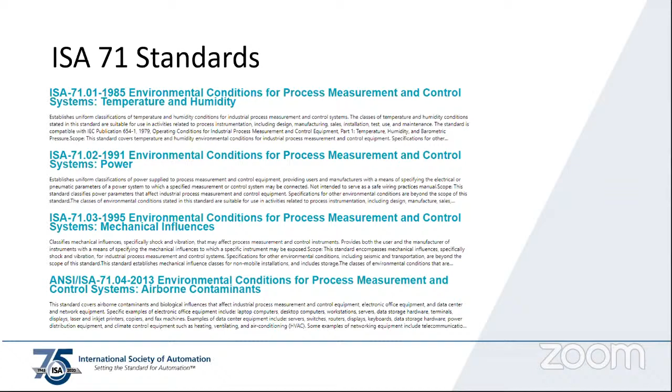So please consider that. So the ISA 71 standard that we're going to talk about today, or the 71.04, is actually one of 4 different standards. So 71.01 was related to temperature and humidity. 71.02 was related to power quality, and then 03 was mechanical influences that you may have to consider, and then the 71.04 is the airborne contaminants. So we'll talk a little more about that.

So to give the history behind 71.04, currently we're at the 2013 revision, but it initially came out in 1985, and it was really set up to look at the airborne contaminants that were affecting industries. And someone can correct me if I'm wrong, but it appears to me like the main industry that was calling for this in 1985 was the pulp and paper industry.

So any of you all that have been in a pulp and paper facility know that there are some highly corrosive gases present, and electronics can take a beating, and even electrical equipment, things like a motor control center, the copper can degrade based off of the corrosive gases that are in the environment there. So in 1985, the standard was born, and it was a way to classify the types of gases that were present and the amount of corrosion that you could expect on your copper as a result of those corrosive gases.

This standard was revised in 2013 as a result of RoHS. And RoHS, if you may know, is the, well, I used to always call it reduction of hazardous substances, but actually that is incorrect. It is the restriction of the use of certain hazardous substances. So that was a European directive that came out in 2002 and was implemented in July of 2006.

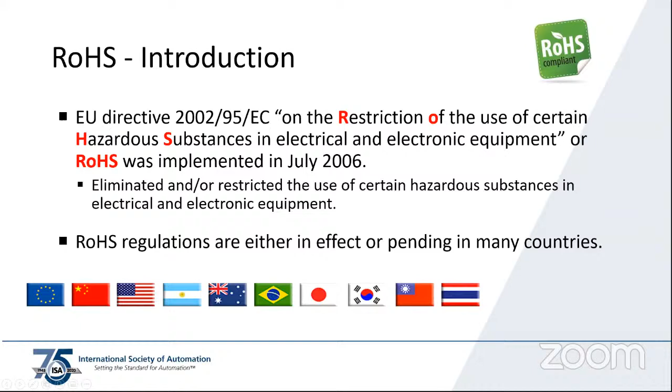So this was the goal. The goal was to reduce lead, eliminate lead from the manufacturing process. And lead was used as a way to bind electronic components to other components through solder. And typically copper wasn't left totally exposed. It was usually covered with a coating or with lead so that it wouldn't deteriorate.

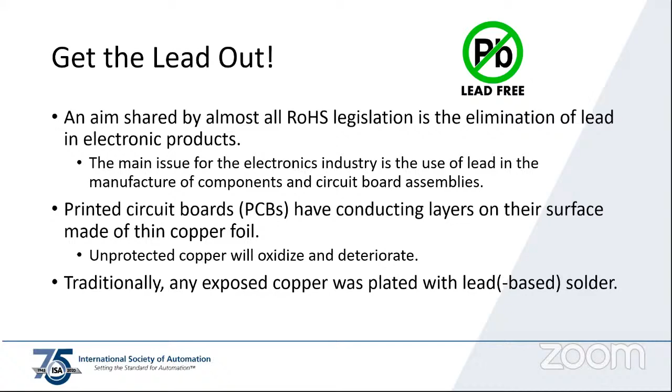But RoHS had some unintended consequences. The manufacturing process switched to where most printed circuit boards were now manufactured with a silver dip process. And silver is a little more reactive than copper, and definitely more reactive than lead, which is hardly reactive at all to chemical elements. So as a result, now with electronics, you can see with the silver dip process problems where you have these flowers, they call them, where you have dendrite fingers grow from the silver and can create shorts in some cases or opens in other cases where you're having continuity issues.

So with us in the electronics world, we don't like varying resistance, and we really don't like a resistance value going to 0 or infinity. So that was the issue we have here with some of the formations as a result of the use of silver instead of lead solder.

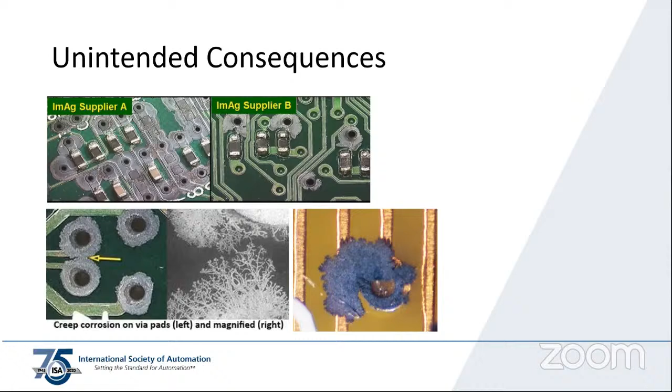So here's the information on RoHS and reliability. The silver immersion technique gives a path for dendrite fingers to form on surfaces. They can get underneath surfaces and then combine surfaces. So you can make opens or shorts as a result of it. And so this is a pretty serious concern.

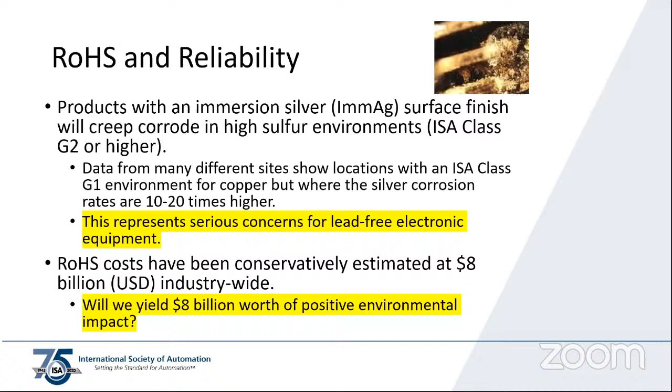It's a big question. So going back to the ISA 71.04 1985 edition, back then, the only thing you were really worried about was copper reactivity. So you classified your area as G1, G2, G3, or GX. G1 being mild, meaning that your electrical equipment and your electronics could live there without any problem for quite some time. If you had a G2 level, a moderate level of reactivity of copper based off of the gases present, you could potentially see some corrosion. So you might want to take that into consideration and implement some form of remediation or prevention of the gases attacking the equipment.

Now, if you got into the G3 area, your probability is getting much higher that a corrosive attack will occur, and then you get above into the GX level where it's severe, and now you're looking at equipment that's specially designed to be able to survive in that type of environment. So it's a very corrosive environment.

So the reactivity is measured in angstroms. If you're less than 300 angstroms, you're G1. Less than 1,000 angstroms, you're G2. Less than 2,000, G3, and then anything above 2,000 angstroms is a GX or severe level.

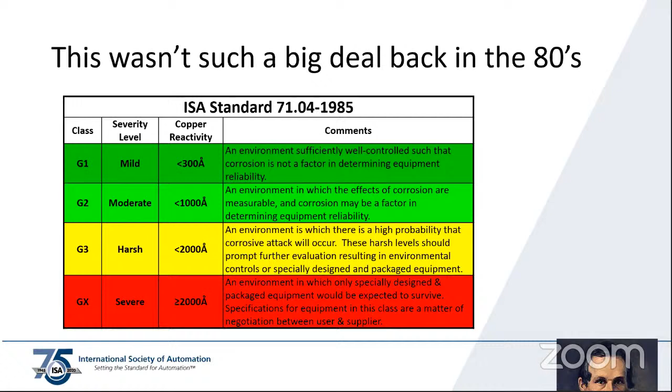So what's an angstrom, you may ask? This guy, he's an angstrom. That is Anders Jonas Ångström from the 1800s, and he came up with this unit of measure. An angstrom is actually 10 to the negative 10 meters, so 0.1 nanometers is an angstrom. And to give you a reference, for most elements, the diameter of the atom is about 1 angstrom. So very tiny.

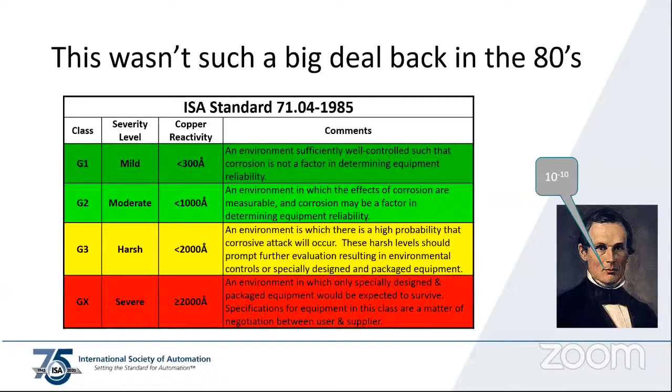And I'll turn my little handy dandy laser pointer on here, which Wayne showed me earlier.

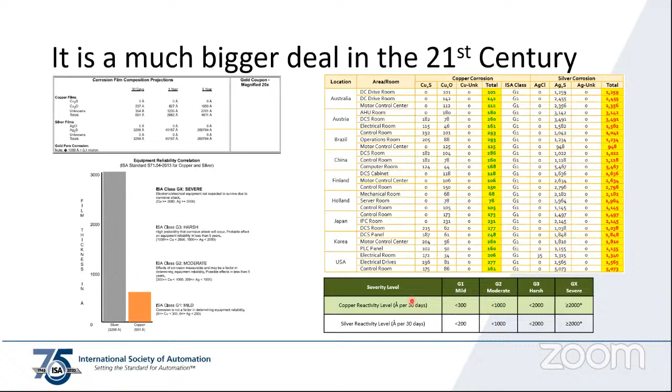But now you come over here to the silver column and you look at silver. Right here we're at 1200 in this DC drive room in Australia. So that's a G3 right there. So it's a low end of a G3. Here we're low end of a GX right now. GX, higher GX, G2, G1. So you see down the road here, we've got more of an issue now because of the silver reactivity. So as you may know, this is kind of a big deal.

All right, but there's more. It's more than just the silver reactivity. Guess what affects chemical reactivity? Humidity and temperature. Does that sound familiar to anybody on the call here? High temperature, high humidity environments. There have been studies that say that the chemical reactions can actually occur twice as fast for a 50-degree increase in temperature. And then that gets even compounded more when you add humidity into the equation as well.

So you need to be concerned about temperature and humidity, not just while the equipment is operating, but is it being reacted while it's sitting in your warehouse on your shelf in storage or in transit to your facility? The reaction process could be occurring anywhere along the line, from the time the product is made, transported, stored, and installed in your cabinet. So commissioning, doors are left open during the commissioning process, and there's a corrosive environment there. Is the electronics being affected at that point?

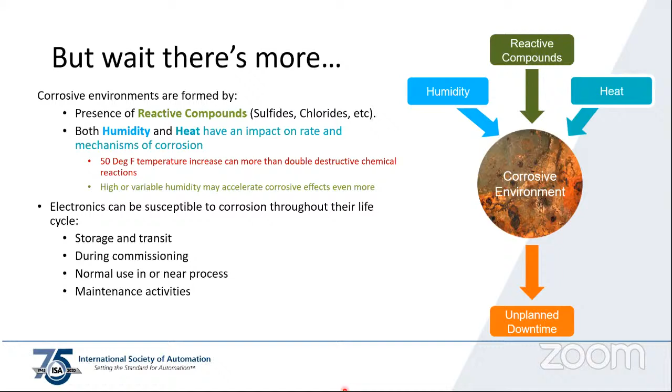Normal use and then maintenance activities. Sometimes, as we all know, some periodic maintenance may actually introduce problems, because now you're opening cabinets and doing work and again providing a path for those chemical reactions to occur in those electronics. Okay, and there's even more. Besides temperature and humidity being contributing factors to silver reactivity, what are we doing in electronics these days? Running smaller and smaller components at faster and faster speeds that generate more and more heat. So that compounds the problem even more.

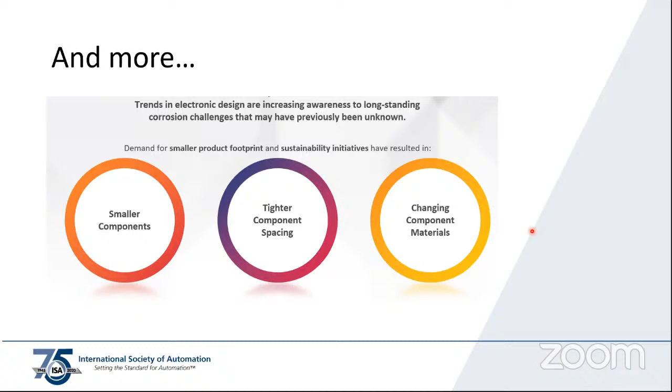So all this leads to some unplanned downtime, and there are several issues here. One is that industry standards such as 71.04 are not widely known. The standard's been out since 1985, got revved in 2013, but it's still not a widely known standard. In 28 years of doing this, I think I've seen 2 specs come across my desk that had someone asking for their electronic equipment with a G3 rating or better. I know we have products like that. We do conformal coated products, and I'm familiar with people using those in harsh environments. But as a general specification, I don't really see that too much.

Sometimes problems are misdiagnosed. So maybe you've got a problem with an electronic component and you're thinking, oh, they just don't make them like they used to. The quality's gone down on this product. Maybe that's not the case. Maybe it is the manufacturing process, but it's due to the way the world now tells electronics manufacturers how they have to manufacture those components, because they can't use lead anymore.

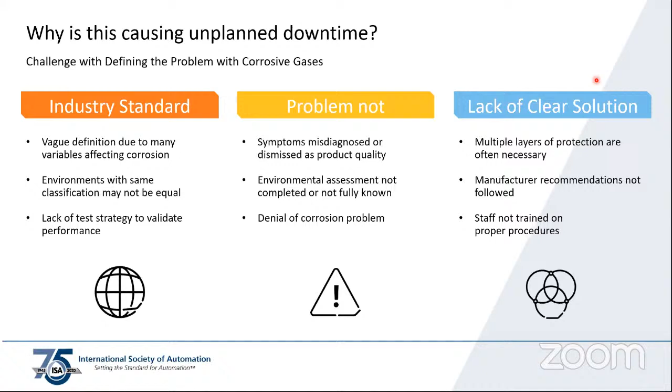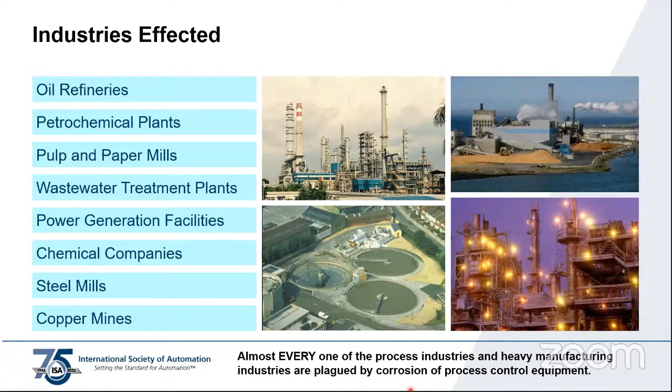So first off, who are the industries that are affected? Well, most people on the call here, you're probably in one of these industries. So refineries, petrochemical plants, pulp and paper, which we talked about, kind of the genesis of the problems came out of pulp and paper, water, wastewater, power gen, steel mills, copper mines. They all are affected. One that's not shown on here is the tire and rubber industry. And actually, it's my next slide. I'll go through that. Tire and rubber is a very caustic environment.

And so here's just a table from a design guide that I had access to for the tire and rubber industry. And it goes through the various process locations and then classifies what you're most likely to see corrosion risk-wise in these areas. So the mix area, those are GX. Component preps, where you got your extruders, those are GX. Now you move over into the tire building facility, you're still G2 or G3 here. Curing process, you're back at a GX. Even the conveyor lines are at G3 or GX for the cured products.

You don't get into kind of clean air, if you will, until you get into the conveyors for the final finish area, or in your material handling side. Once you've built the tire and you're storing it in the warehouse, now you're down into a G1 environment.

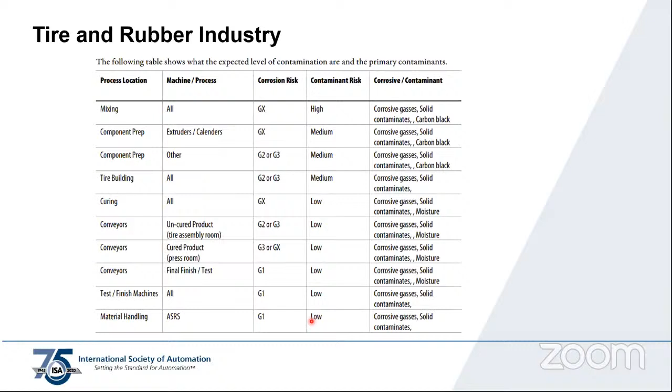Water, wastewater, kind of same thing based off a design guide here. Here are a few different locations in a water treatment facility, and their levels and what types of gases are present here. So office space, you're okay. Electrical room, probably all right. Now you get into the headworks and clarifiers. Those are high corrosion environments. Sludge dewatering, sludge storage, lift stations, all high corrosive environments.

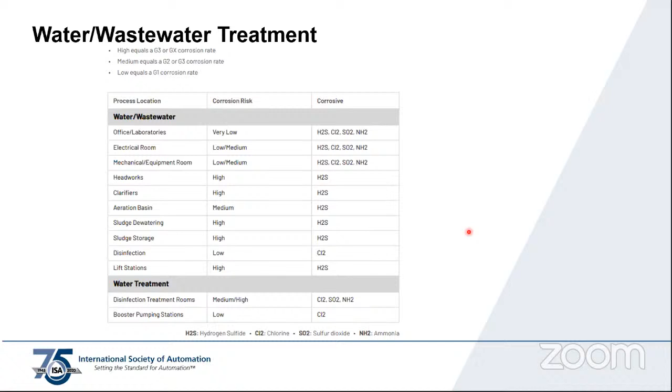So what's the cost of corrosion? Well, whatever an hour of downtime is for you is what you would figure out. It's going to take you multiple hours to figure out the problem, but we all know about the cost of downtime. In this particular case, pulp and paper mill, kraft paper. For them, it's $42,000 plus per hour of downtime.

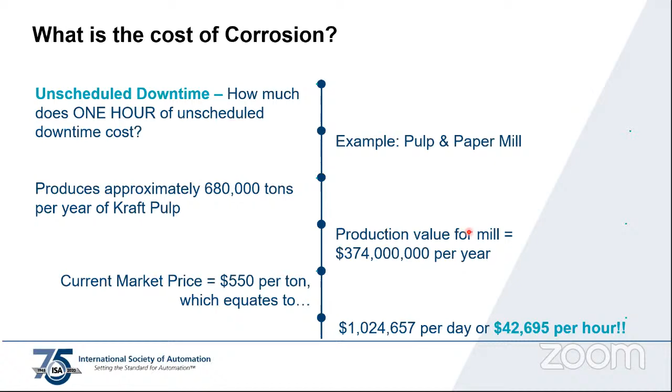All right, so we've kind of stated the problem. Now, what do you do to fix the problem? Well, there's a three-step process, and it really consists of first assessing your area. So figure out, do you have corrosive gases present in the enclosure or in a building or in an area? And if so, how bad are they? How bad do they react copper, and how bad do they react silver?

Next step is, once you know what you're dealing with, are you dealing with G3 level gases? Are you dealing with GX? Are you just dealing with G2? Based off of each issue, you come up with a control strategy to knock that level down to an acceptable level, which would be a G1 level. So as I mentioned, there's no one silver bullet. And so just like safety and security, it's all about layers of protection. You build several things into your process to protect and control the corrosive gases that the equipment's going to be exposed to.

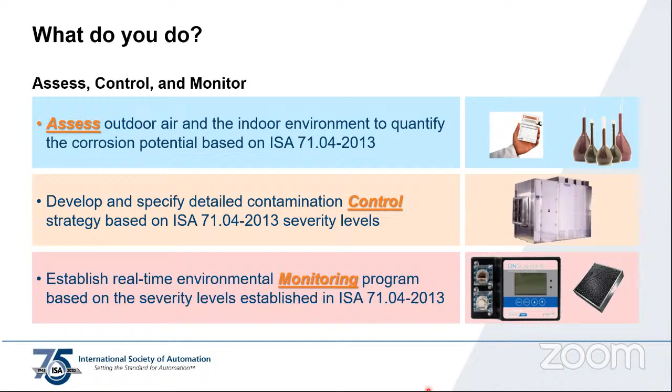And then once you put your control procedures in place, you need to monitor them. You need to make sure that what you put in place is still holding. You may have spent a ton of time sealing your enclosures up and making sure that all the penetrations were nicely sealed. But you got a PM happening and somebody leaves a door open on the enclosure, and so now you're back to square one. So you got to continually be vigilant and monitor the conditions. And the ISA 71.04 standard can help with all this.

So the first thing on the assessment side is what's called a corrosion classification coupon or a reactivity monitoring coupon. As I mentioned before, very simple, low-tech, at least on implementation and the testing side. All the smart guys in the lab have to give you the analysis. But what you do is you get one or several of these corrosion classification coupons, and you put them in various locations. So you put them near the return air in, let's say, a drive cabinet that's sucking return air in to cool the drive.

You may want to put one on that enclosure, various points in the building. So places where there's airflow, you may want to put one of these coupons. And what you do is you leave that coupon there for 30 days. And then at the end of 30 days, you put all your information on there: company, location, application it's in, the date you put it in, the date you took it out. So all the various information about the application.

After 30 days, you put it in a bag, send it back to the lab. The lab analyzes it, and then they generate back to you a report that shows you what's going on in your facility, and how reactive copper is and how reactive silver is based off of what's going on. And there are various manufacturers of these coupons. I can think of probably 3 or 4 people that offer these coupons and these services. There are variations to these coupons too.

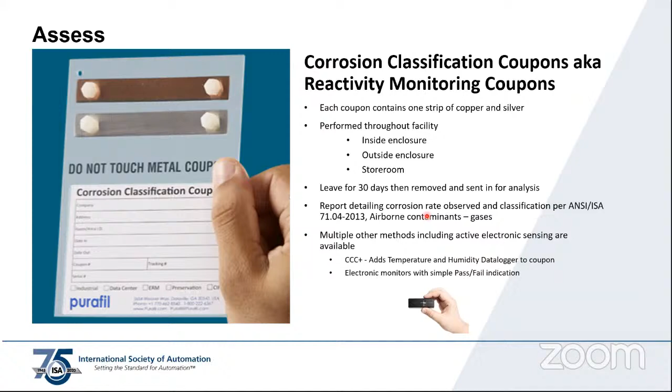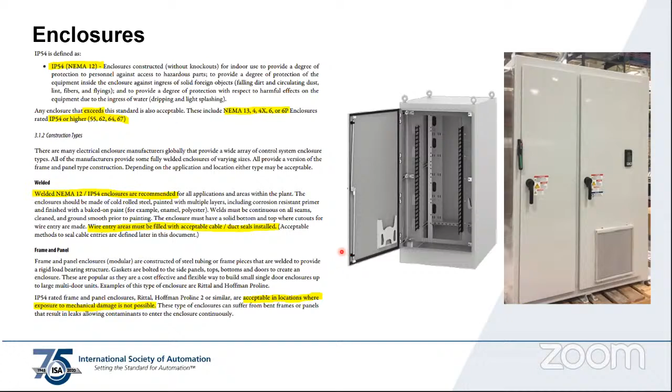One thing to note here is cleanliness, looking in and making sure that your cabinets stay clean. Because the gas isn't the only contaminant that's an issue, dust is an issue for electronics as well. So it's always good to keep a clean cabinet and keep the dust down.

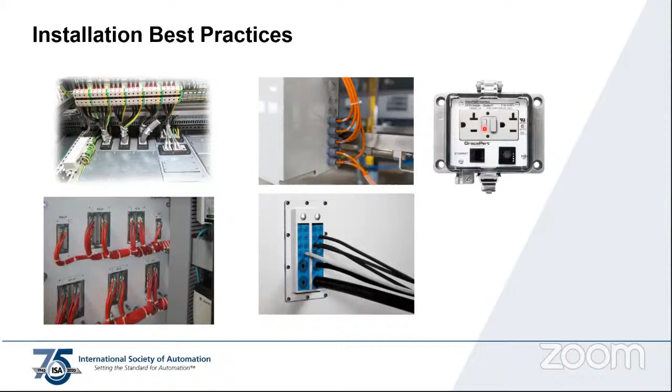And then you want to keep the doors closed. So if you're going to spend all the time sealing these devices and cabinets up, you can use a device to keep the doors closed. If you need to access a drive, a PLC, or your control system, there are devices you can mount on the enclosure that allow you to get access to that network without having to open the door. So those are good to have as well.

All right, so the next thing you want to do is make sure you're looking at temperature control. Whether that's air conditioners on the enclosure or fans, both can help with temperature control. If you have the chance to use a filtered fan versus a non-filtered fan, please go the filtered fan route. That's going to give you a better chance at knocking down some of these corrosive gases.

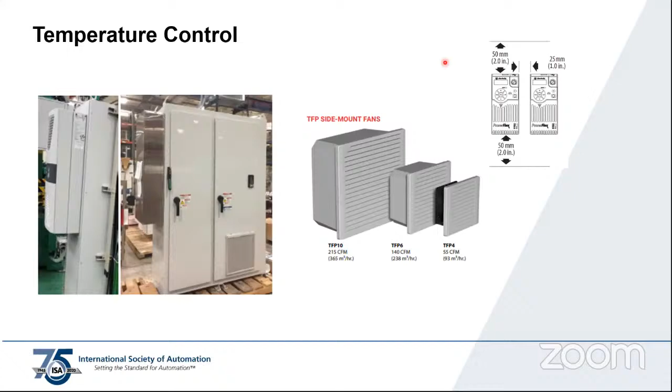And then in your installation procedures, make sure that you don't add to the heat problem by installing your devices incorrectly. Follow your manufacturer's recommendations on proper distances to the top of the enclosure, to your wiring duct, to the sides of the enclosure, and from device to device, to keep the temperatures down within the normal operating limits for that equipment.

And then we mentioned humidity. Humidity is a big issue, especially for us here in South Louisiana. So there are ways that you can help with humidity and its effect on corrosion. You can actually put dehumidifiers in the enclosure with a drain, either a stainless steel drain or a non-metallic drain. So that exists.

The old tried and true desiccant packets, nothing wrong with a good PM program using desiccant packets, swapping them out from time to time as they go through their useful life. And then you have corrosion inhibitors, corrosion sprays, a whole host of products that can help keep that moisture out and keep corrosion from occurring.

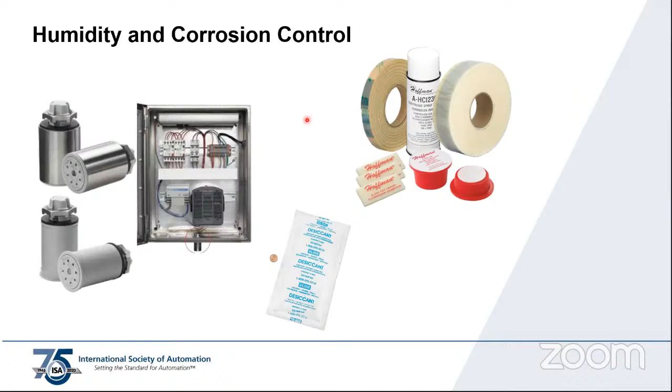And then you can also attack this by purchasing products that are better suited for that environment. So instead of just purchasing a product that was not rated for a corrosive environment, you can purchase products that have been manufactured and tested to the ISA 71.04 standard for a certain level. So you can buy G2 and G3 level products, or G3 plus into the GX level even.

So pretty much every process control manufacturer out there, PLC manufacturer, all offer some level of protection, and they utilize that ISA 71.04 standard for their testing, and they warranty the products based off of that as well. And what's interesting to note here is that there are some new manufacturing processes as a result of RoHS related to conformal coating. So conformal coating today isn't necessarily the same as it was a few years ago. And that's actually my next slide. So let me jump to this one.

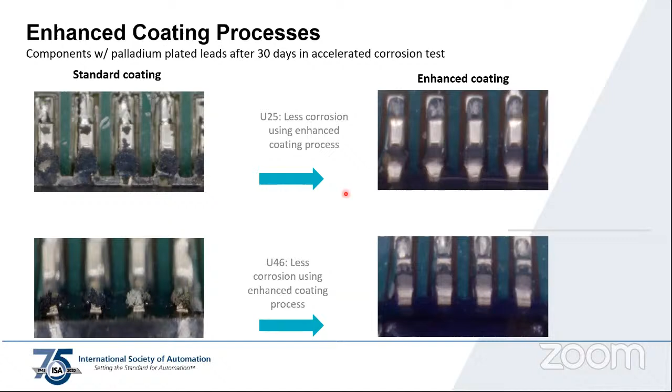So this was my other point, the coating itself. Conformal coating today can be different than conformal coating of years past. It's been determined that some of the older spray conformal coating processes still left enough area to get to, and were porous and could crack over time to where corrosive gases could intrude and get under that coating layer. So there have been advances made in the coating process, and some manufacturers do accelerated testing on the mixed flow gases to make sure that these new coating processes can hold up to very harsh environments.

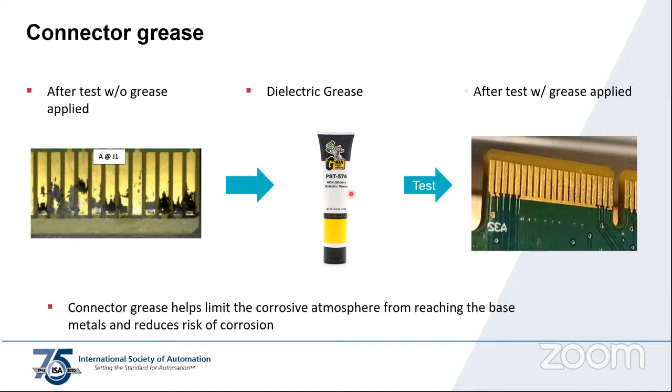And then, kind of like the enclosures, on your electronics as well. If you've got plugs and ports and covers, use them. Don't take those off. Keep them on. If you have unused Ethernet ports, plug those up, or unused connectors or fiber optic ports. Always good to keep the plugs on those things.

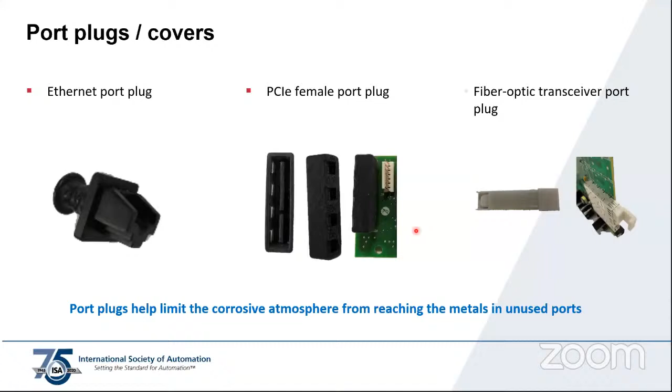And then the last thing you can do is actually attack the air itself. So if there's an electrical building or a control room where you have an issue with corrosive gases in the air, you can always attack that as well. There are many different methods to do air exchanges with the equipment in that room through some sort of media that will remove the corrosive chemicals from the air and get it down to an acceptable G1 level.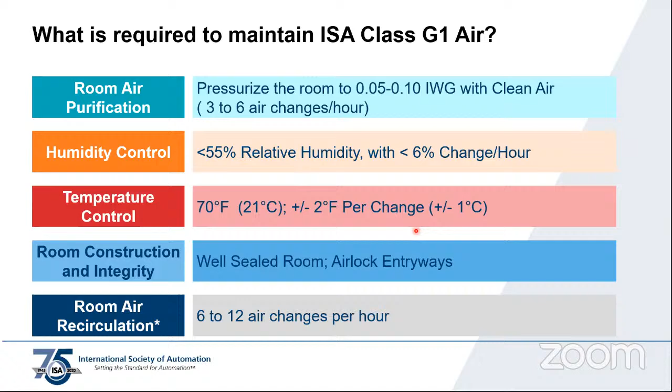And could probably do a whole presentation on that in itself, and that would not be me giving that presentation, because I am not a good air conditioner, airflow, air exchange kind of guy. But if that's of interest, maybe we could do a follow-up presentation.

And like I said, there's a lot of different technologies here, a lot of different types of scrubbers. There's ones that mount outside the building. There are ones where you need to build that into the design or retrofit them into the building. There are some that you simply put inside the building, put the media in it, plug it in, and if it's a smaller volume of air, it can just recirculate the air inside the building and clean up the gases from the air.

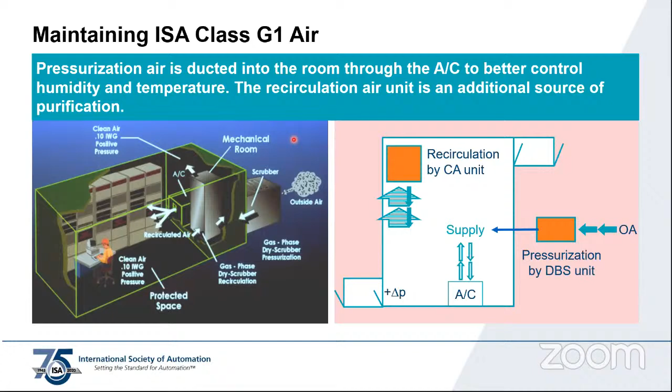So the last piece of it is, so we talked about assess, control, and then monitor. So the last piece is the monitor.

If you're going to determine what your problem is, what gases you have, and how you need to reduce the problem, you put your control mechanism in place. You work on your enclosures, sealing up all your connections. You potentially utilize more robust electronic hardware that's been hardened to fight off these gases, and maybe you've taken means to even improve the air quality in that room itself. So you've deployed scrubbers, etc., just to knock that corrosive gas down to an acceptable G1 level.

So you do all that stuff, but you still need to keep monitoring. You need to monitor the media you've used if you've deployed scrubbers, or monitor your enclosures. Are your doors closed? Are your gaskets being maintained? Are you keeping the dust out of the enclosures? Just straight visual inspections, to make sure that whatever control measures you put in place are still working.

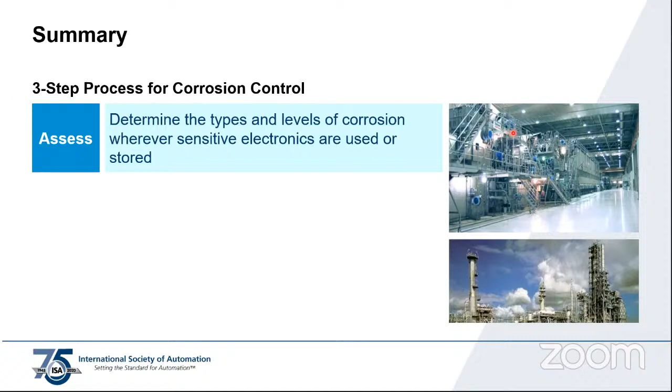So in summary, there's really a 3-step process for corrosion control. You've got to assess first, so you determine what types of gases are present and what levels of corrosion you're seeing on copper and silver both. And if you're going to have a problem, more than likely it's going to be on the silver side first. So you have to assess the area and figure out what you're dealing with.

Then you put in your control measures. Figure out what you need to do to make sure those electronics are only exposed to G1 type air if possible. And if not, use electronics suitable for G2, G3, or even GX environments if that's what you have to do. And then monitor. So you put your controls in place, but you still need to keep monitoring to make sure the controls you put in place are doing the job and you're still protecting your equipment and preventing unwanted downtime.